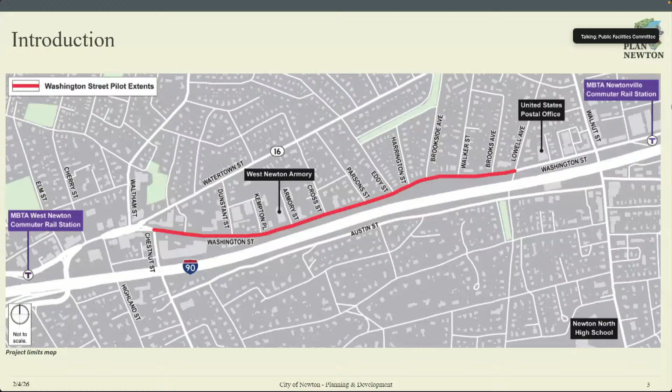Cool, so just to get us kicked off, this is the area that we're looking at for the project limits, between Lowell Ave and Chestnut Street. And then again, just for more context, bringing up the 2019 Washington Street Vision Plan adopted by the City Council in December of 2019, covering Washington Street through West Newton and Newtonville, helping us as staff and citywide to assist in informing our discussion about public investment in guiding development and zoning changes.

And that's sort of where we're at with coming up with our goals and our vision for Washington Street for this pilot.

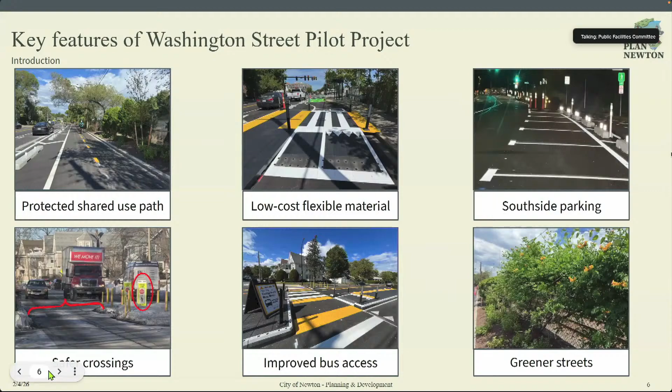Okay, so these are the key features of the pilot. We have the protected shared use path, using low cost flexible materials, and then unlocking south side parking, greener streets, some landscaping on the south side as well, protecting Mass Pike. And then safer crossings using the pedestrian median islands and these signs, and then improved bus access with these raised platforms, these modular platforms.

And then, let's see, it's delayed. These are some pictures throughout the implementation process. So we have pre-construction, during construction, and then towards the end of construction, the Zikla bus platforms—that was in August, so that was the last thing to go in. And then this is a picture of the landscaping, and then various members of the project team walking through.

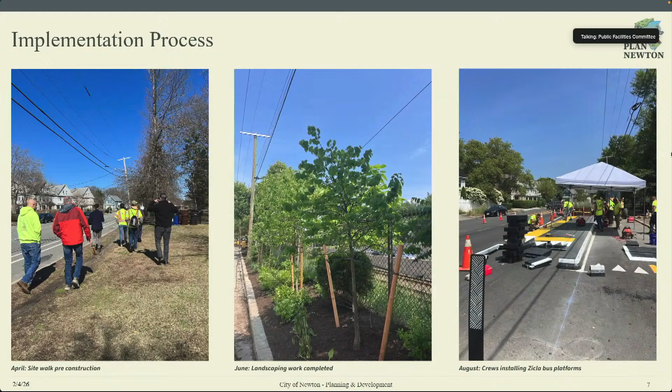And then quickly, again, high level, from plans to construction to completion. So, yeah, again super high level, starting with the curb and landscape prep work all the way to where we're at today with a public facilities update with our data collection.

And then I'll quickly go into communications, which is important because this is how we receive feedback for creating adjustments. So we sent postcards to abutters within a radius that I'll show on the next slide. And then we had our project email, which was heavily utilized by people to let us know how things were going. And again, just to reiterate, we did send postcards to abutters.

And then we also had 6 large yard signs that you may have seen out there. And we received over 200 emails and responded to them as well. A further breakdown: about a third were strongly supportive, a third were negative, and a third were pretty neutral with general questions or suggestions.

We used Constant Contact, with a project email list of around 840 people. We sent 10 newsletters that we also pinned to our website, with an average open rate of 80%, which was great. So people were well informed, and we were updating them on construction and any changes.

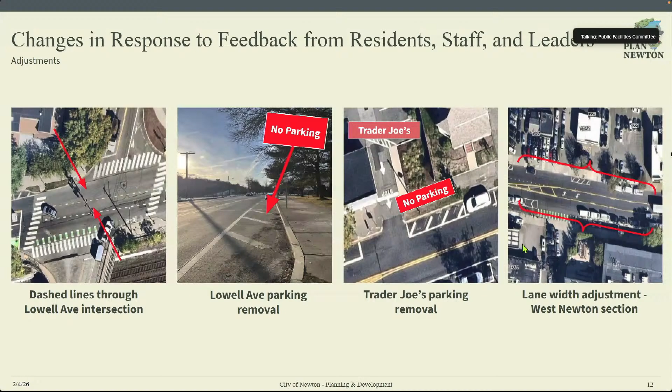And similarly, though we don't have an image of it, in front of Trader Joe's we shifted the parking spots closer to the shared use path and added an edge line. Drivers reported being more comfortable opening their car doors — it felt like they had a little more space there. And we shifted cars a couple feet over, so the fire department was much more comfortable as well.

We also made a number of minor sign and pavement marking adjustments that we don't need to go into details here on, just minor shifts and clarifications and making sure signs were pointing the right direction.

More recently, we made a couple other additions that we've been working on since this fall. One is the object markers on the planters, which is an MUTCD approved sign. We heard feedback from residents that we wanted to make sure the planters were more visible, and this is the standard sign used for that. There's the sign now facing the planters, facing drivers and also facing cyclists, which should help draw attention to the planters, especially in low light or weather conditions.

We also added crosswalk pedestrian signs, which you can see here on the median islands. They're on paddles, so they're a little more flexible and also right down by the line of sight of drivers. We used the metal signs that were planned there to double up the pedestrian signs on each post on either side.

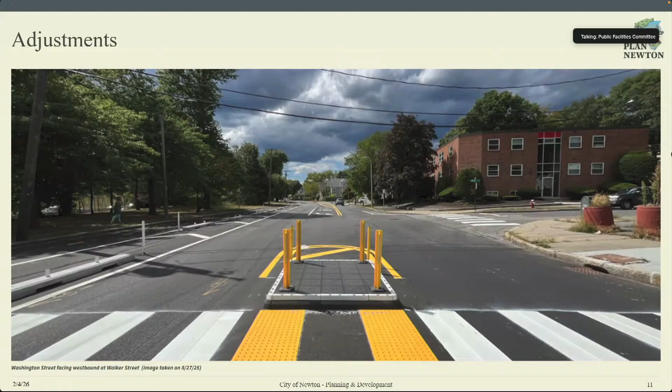Like, I've heard that you guys were thinking about removing the planters. Is that not true? That was just from constituents who said they got so much negative feedback about the planters, they're gonna take them away, so I'm going straight to the source. I should clarify, at this point we don't have any plans to do anything. It needs to be revisited with the next set of changes developed, and part of it is it being a pilot and trying all these things out. Then thinking about what we want long-term. We do get feedback about all the vertical elements, reflectivity, the material. But the more you build into infrastructure, and the better designed it is, the less signs you need. Otherwise you're adding more and more signs to prevent issues. So anyway, that's just a comment.

When you say you have not gotten much business input, what about Steinert at Parsons? Because you didn't mention that. Yeah, so I know that's an issue. They had reached out to John Sisson, the Economic Development Director, and I think it just sort of fell through the cracks. So I will make a note of that and reach out to them. Oh, please do. Yeah, I can go into detail on what the request was.

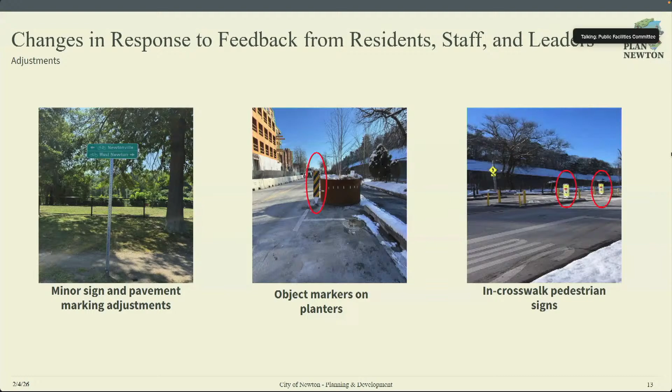All right, sporadic. Do you guys follow social media on it, or do you just look for input that comes directly? Oh, we'll check too. There's a lot of comments that happen on the variety of Newton community Facebook pages. So we follow it. There's quite a lot of open discussion about this. Yeah, we definitely check. So you're getting a lot of feedback back.

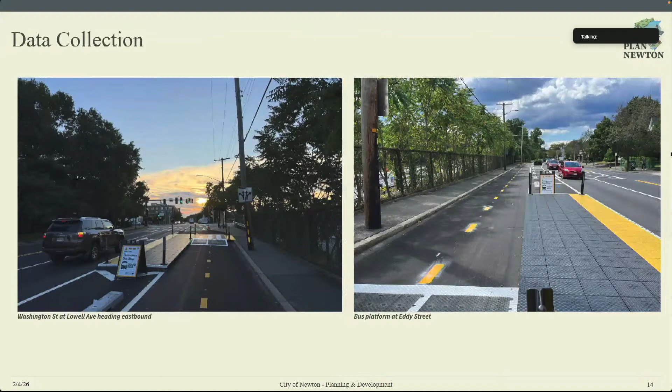All right, let's go on to the data. Okay, oh, it hasn't loaded yet, just a moment. Here we go. So this is the data, so first of all, our baseline data from fall of 2024 and our post-implementation data from fall of 2025 are on our project website.

Which is newtonma.gov/Washington Street, with street spelled out. The reports are quite detailed and include the raw data, so don't print them, the first one's 250 plus pages, the second is 300 plus pages. And we wanted to talk through the project success measures that we laid out at public facilities, I believe it was May of 2024, with our consultant, Howard Stein Hudson. So we'll talk through this post-implementation data as compared to the baseline data.

So post-implementation data, we measured the first full week and second full week of October. This is 6 weeks post-implementation, but because of the construction configuration over the summer, people had a chance to get used to the road configuration a little bit. At 6 weeks out, we noted the first 3 targets: average speeds on Washington Street closer to 25 miles per hour, 85th percentile speeds closer to 30, and max speed under 45. We achieved all of those.

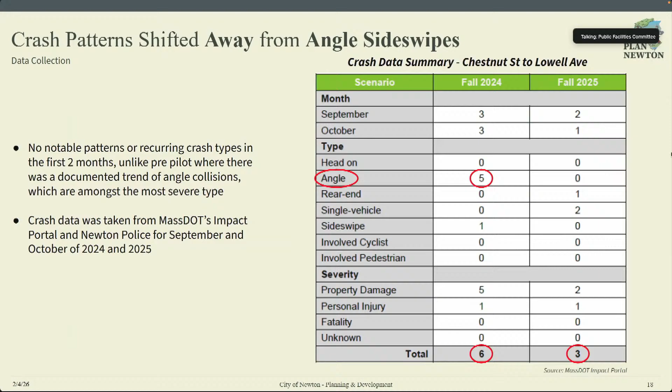Just a clarification - are those the cars pulling out and hitting people on Washington Street when you mean an angle crash? Yeah, an angle crash, this kind of crash. Vehicle to vehicle, or vehicle to human being? Vehicle to vehicle, vehicle to person, vehicle to stationary object - they're not separated out by type. Well, there were 0 that involved pedestrians, so none of them must have been pedestrian. Right, over 2 months it's hard to come up with conclusions.

Part of our focus was on making sure traffic was not diverting to other routes, from Washington to Watertown, Washington to Austin, or our side streets. We saw no evidence of a new diversion pattern to side streets. We saw a 19% decrease in traffic on Washington Street itself. Watertown Street showed no increase in traffic. Austin Street was under construction in fall of 2024, so we needed to use earlier data from 2021 - we will want to monitor that going forward.

I have a question - what I did notice in the data is that some of the side streets, like Eddy and others, the volume did increase. Overall, Eddy decreased by 92 vehicles. I just wonder if there's some pattern you can see - I understand it's important for the committee to realize this is early data. Directionally it's really good, but it's early because it's only been one season.

Problem with Waze - Waze sends people on Eddy Street to Elliott Street to get to Washington. So it was Eddy and a couple others that were parallel where I was seeing more traffic. Eddy had an increase of 115 headed north, from about 1500 to 1600, and a decrease of 200 headed south, from 1700 to 1500. So a net decrease of 100 - an increase headed north and a significant decrease headed south. Those people are trying to get around.

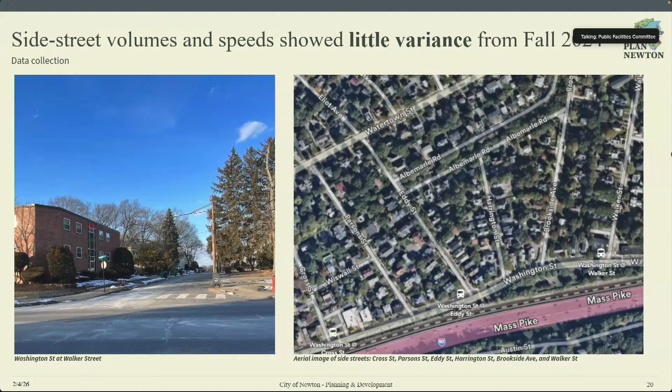Yeah, the data are interesting to try and think through the patterns. This was a week's worth of data too, so a lot of it is impacted by other things going on that week on the corridor and other projects. It is fun to try and think through what's going on. The week was October 4th through the 10th - we worked around city events and wanted a week where school was in session the whole week, and that was the week that fit.

So the target was a 20% increase in pedestrian and bicycle volumes at peak times, and we achieved that for bicycle and pedestrian. We did see an increase in the western end for pedestrians, slight decrease in the eastern end. This data is largely from a single day, so if we're interested in gathering more bicycle and pedestrian data, we should think about exactly what we want to collect and the best way to collect it.

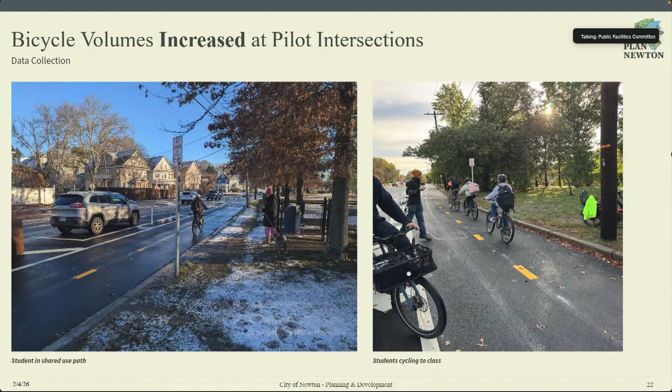Overall, we saw a clear shift away from sidewalk bicycle riding. 72% of cyclists use the shared use path, only 13% on the sidewalk, whereas before the pilot almost all bicyclists were on the sidewalk. Staff, mostly Hannah and I, conducted several counts during the morning commute, 8:30 to 9am. On average, from those 4 counts, 27 cyclists were seen on the shared use path versus 2 on the north side sidewalk. So cyclists seem to be adjusting.

Parking utilization is another thing that we've been tracking very carefully. The project success metric was to keep parking utilization under 85%. We achieved that - the average weekday utilization increased to 61%, up from 31% in 2024. As you can see, parking utilization is very high at the west end, and lighter at the east end, though we saw parking throughout the day at the east end, particularly in front of the new dog park.

We collected parking data both during the weekday and weekend periods, and that is at the back of the technical memorandum. You can get into detail on parking utilization by hour. They looked from 10 to 4.

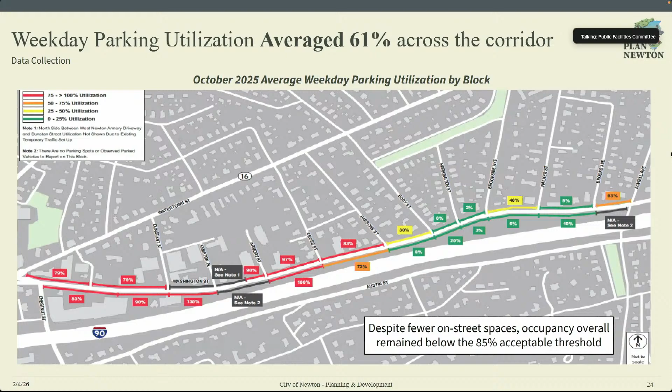Okay, then we'll go through some of these. The goal was not to increase travel time along the corridor, from Chestnut to Lowell, by more than 35%. We achieved that in the westbound direction, and in the eastbound direction we did not achieve that.

That is because at the same time we were implementing the Washington Street pilot, we added a new traffic signal at Lowell Ave, which now allows for protected left turns from both directions. Those traffic signal changes have resulted in additional time to allow for those left turn movements, which means the other directions of the signal queue up more. We have heard really positive feedback about making those left turns and about the signal in general, which is great, but it does result in a longer queue, really just 2 periods a day - I believe 30 minutes in the morning from the 8 to 9 window, and then 15 minutes in the evening. Traffic backs up there.

Does the no right turn on Chestnut and Washington have anything to do with this pilot, or is that a totally separate traffic plan that's been put into place? I did look at that in detail - it was added, I believe, as part of our pilot.

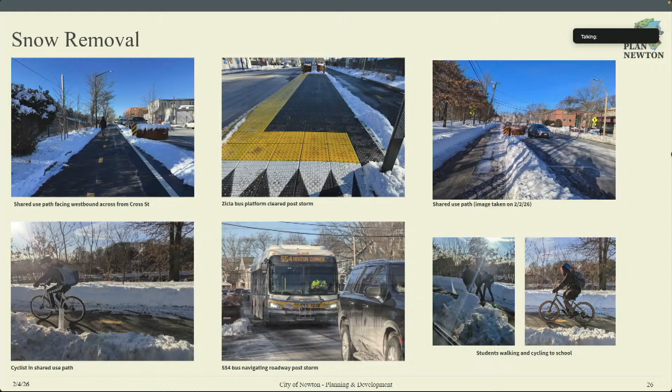Looking ahead, wrapping everything up, we're working to coordinate with Newton Crossing, formerly Dunstan Development, for the design of the streetscape in front of their property. Jen's in coordination with them for that. Currently, it's just the Jersey barriers along that area.

And then, like we've all been talking about, to gather more data, whether anecdotal or formal, and continue to engage the public with feedback, making any adjustments based on that feedback.

Thank you. I would encourage you—let's go to Councilor Albright now.

I was just going to ask you, when is Newton Crossing going to get their Jersey barriers out of the way? Just spoke with them—I believe it's summer. It will be restored by the end of summer 2026.

Okay, so that's soon. And Dunstan Street is still one way, but that will return to two-way at some point, maybe around that same timing. So that definitely will result in some traffic pattern changes.

So what I was going to say is I would encourage you to think creatively about what you can measure, because the question is going to come about extending this or continuing it, and councilors are going to have questions about things we can't anticipate. So whatever data you're getting, if it's anecdotal, put it in spreadsheets, put it in different categories so you know, because that's really the only answer we have—that's what we can point to. So think creatively about what you can be measuring and what you can't.

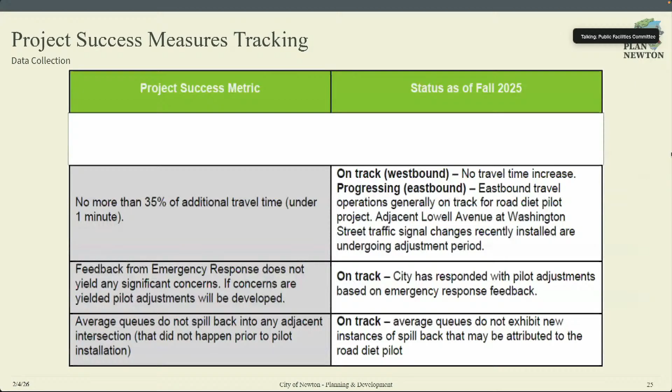Yeah, thank you. Hannah made a really interesting timeline of emails we received versus what was going in for construction. So people were really concerned about specific things during construction, and then we'd implement the next part of the project and address those concerns.

It was very interesting. So many of the concerns over the summer were things that were already included in the pilot but hadn't been installed yet. So we can revisit some of that and see if there are other things people were interested in that weren't part of the pilot that we can measure, or we're really interested in some of the feedback from the shared use path users, and certainly the businesses too, now that it's fully implemented.

And when we were receiving emails, we were categorizing those—is this a planter concern? Is this a parking concern? So we were able to see how many concerns were in each of those higher level categories, which was interesting too. We can share that information as well.

Yeah, and please share your suggestions too—we welcome them. The Washington Street email, Hannah and I both look at those messages. It allows us to organize and make sure we're keeping track of suggestions. So please reach out to us too.

I think the extension of it is going to be larger than this piece, which is probably why we started with this piece as we head towards the corner. This part was more doable than either direction, but heading towards the Mass Pike and the corner is really tough. So the more information you have before you head into that, the better.